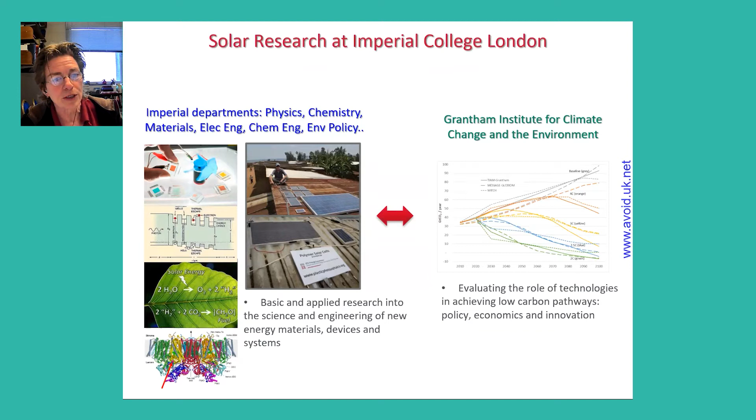And so it was quite interesting to then think, okay, is there some way that we could try to interface our work with these tools that could help to ask questions in a global sense? So coming back to where I came from, for the last probably 20 years, my main research has been focused on soft electronic materials. We used to call them plastic, but basically carbon-based electronic materials and their applications, and particularly to solar energy conversion, also known as organic solar cells, organic photovoltaics.

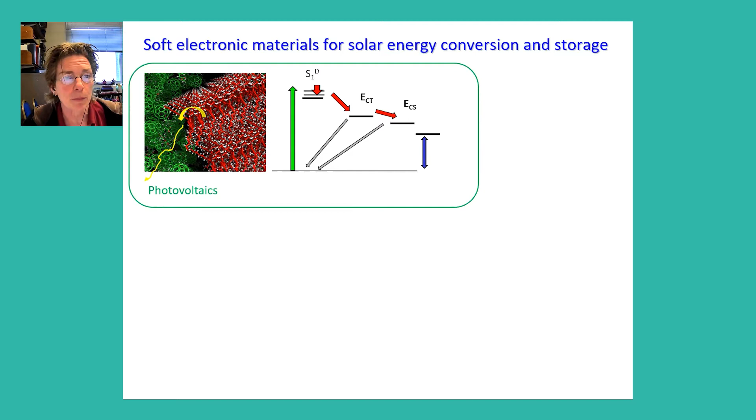And that's a research area that involves understanding materials, looking in detail at the process of a photon absorption, a charge transfer event, and then the generation of electrical current, and how that depends on the chemical structure and design of materials that you make. And more recently, partly motivated by what I've learned from the policy-related research, I've extended that to look at using similar materials in photocatalysis and also for charge storage. So that's an area of applied materials science research.

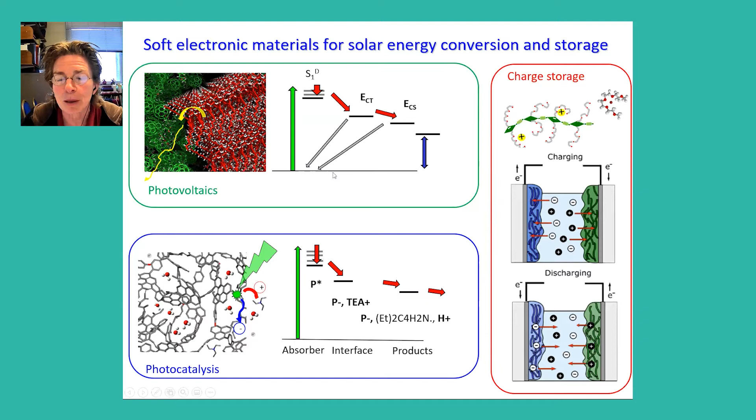But with all of these topics, the goal in the end is to develop materials and devices that will be able to be used to assist with renewable energy generation, and would themselves have an advantage of having a relatively low emissions impact. And one argument for using these easily processable electronic materials is that compared to more traditional materials that have to be processed at high temperature or high pressure, they cost relatively little energy to make, and they are also relatively easy to recycle, and so they could play a part in a circular economy. So there is that argument.

So there's arguments to investigate these materials, but it was still relevant to ask the question, how much could they actually help? And that was the question that I went to when I made friends, so to speak, with the Grantham Institute around 10 years ago. And it then led me onto a journey of doing different types of analysis that I'm going to tell you about today. So the first question is, if it all works out, what difference would it make?

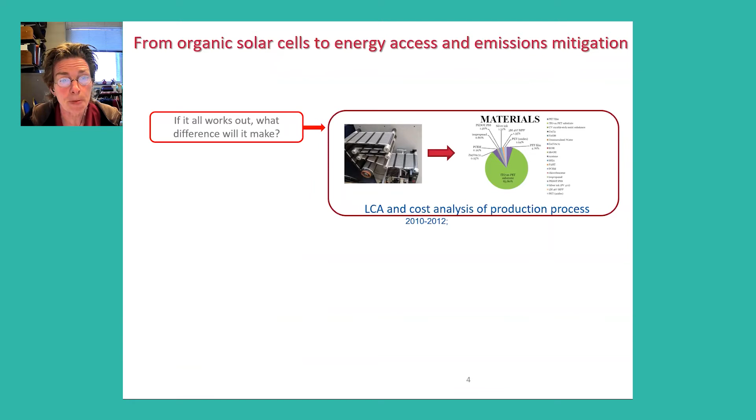And so the very first thing that we did was to implement an analysis in terms of the energy requirements, materials requirements, and the costs of the production process that we envisaged using for our plastic electronic materials when manufacturing them as solar cells. And that would allow us to look at the impact of production and materials on the costs and the emissions together.

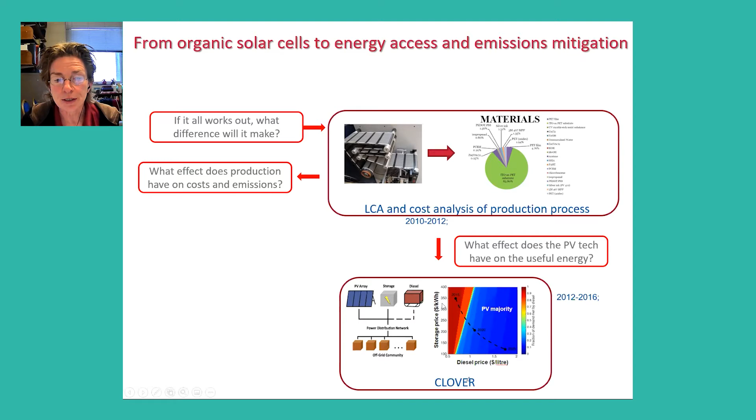And that work then led us to think about the use of our PV technology in a larger context. So in fact, it would be used together with other elements in a system. It might be a grid connected system, or it might be an off-grid system to provide electricity access. And then you need to consider more things. It's a more complicated problem. We need to consider the role of the storage, the competing role of fossil fuels that might be available, and so on.

And then, having developed tools to do that, we then started to look at how those tools could actually be used in practice. And that led to some other projects, which I'll mention briefly today. And then most recently of all, we returned in a way to this materials accounting question to try to apply a measure of energy accounting. I'll explain what that is later on, as a way to try to evaluate different low carbon or mitigation options in general. So this graph basically sums up the things that I'm going to talk about today.

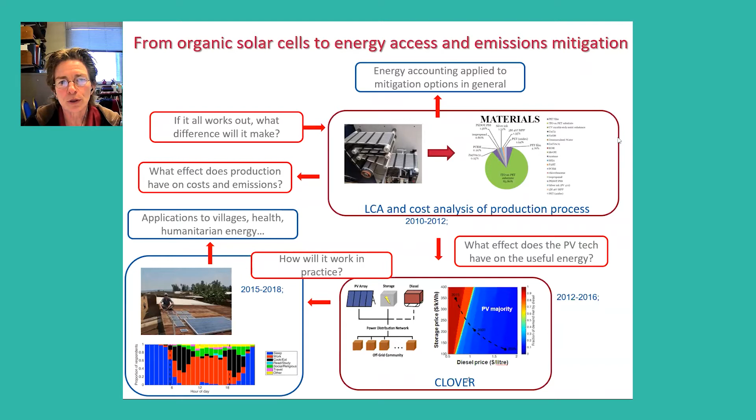And I'm going to start with a few comments on this work that we did early on, looking at the life cycle and cost analysis of materials. This is just another way of looking at the same space, if you like, that we care about when we want to think about the question of what would be the impact in the end of developing a new technology or a new way of making a technology. That involves thinking about the manufacture. What do you need to spend in terms of materials and energy inputs, and also money?

How will it perform when you integrate it into a system with other technologies? And then in the end, how would you deploy it? What are the other issues? What in the end would be the impact on greenhouse gas emissions compared to not having developed the new technologies? That's kind of the big picture.

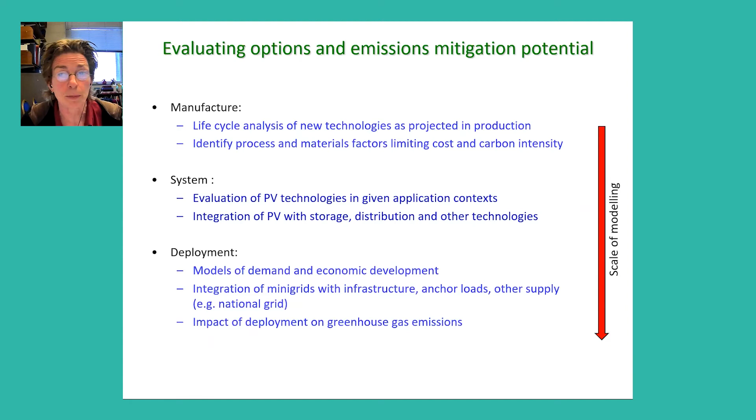So to go back to where we started, as I mentioned, I was looking at solution processable plastic, molecular semiconductor materials that could be used in solar cells. And these materials were very attractive initially from the standpoint that the devices could be made cheaply compared to the processes that were used for silicon or other inorganic solar cells.

And the process would be something that's based pretty much on a kind of high throughput printing or coating process, where you'd start off with an electrode and then you put down layers on top of that, layers to collect the current on either side, and then your active layer in the middle, which is the one that would absorb the light and generate the electric current, electrons and holes from the light absorption.

So in order to make an analysis of the energy input and the cost of this process, we worked together with colleagues in the Danish Technical University who were developing a prototype printing procedure to make such solar cells, and they shared with us information about the quantities and the processes and so on.

And I had a very talented student. Actually, Chris came first of all as a visitor, wanting to get some research experience after he finished his degree, and he ended up staying to do a PhD. And this was the first project he did, the accounting for this exercise.

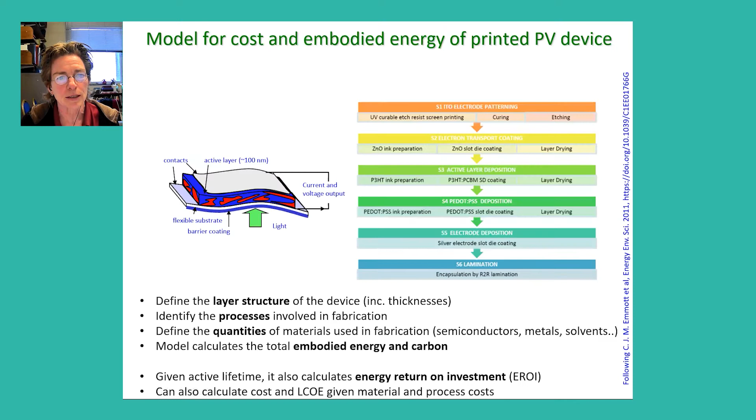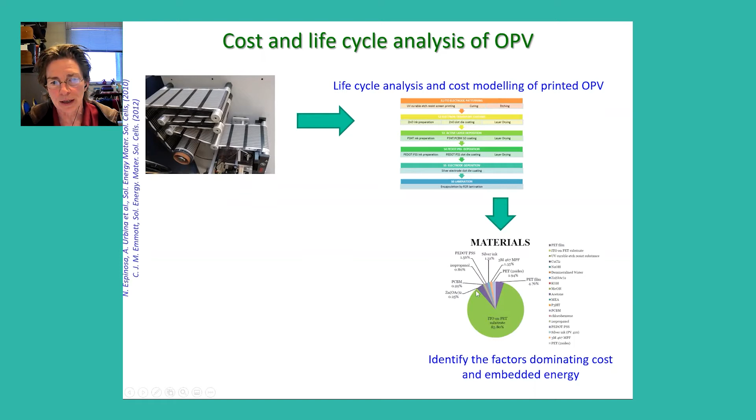And then the point I want to make here, so we took a process. This is actually a photo of the setup in the Danish Technical University. This is just a cartoon of the way we do the elements in our accounting. And then we come out of this with, if you like, a bill of materials that's telling us how much energy is spent on the different components.

And one of the things that this told us straight away, there's one big component. There's like a showstopper, if you like, in terms of the energy required. And that is that this indium tin oxide conductive layer that was put on top of the plastic substrate was going to be the most important component and influence the effectiveness in energetic terms and in cost terms of the device more than any other component. The same thing comes from the energy and the cost analysis.

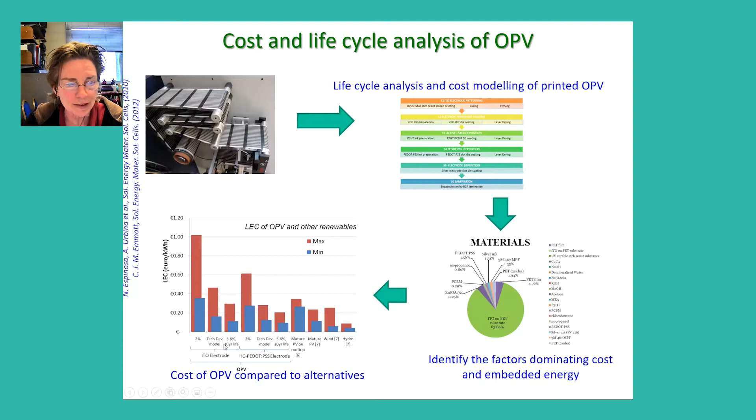And so what that told us at the time was, if you're thinking about what's the most effective thing to research, if you want this type of solar cell to be as effective as possible, it actually makes more sense to go and try to find another material to use as a conductive electrode than indium tin oxide, than it does to improve the active layer efficiency by a factor of 2. It was that big of a difference. On the whole, when you think about the energy and cost balance, it would be much more effective to find a better electrode material.

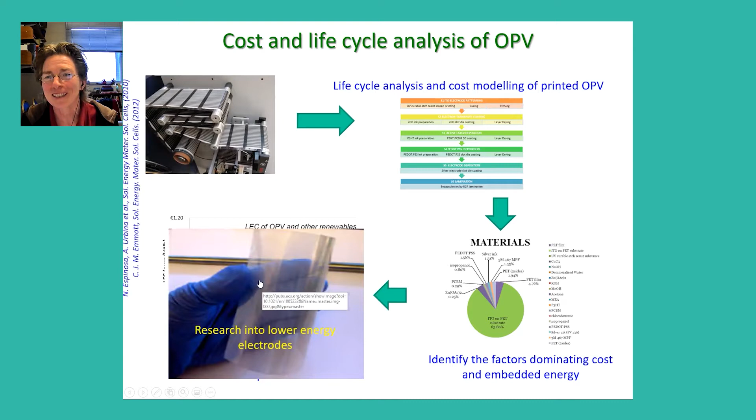So that's just an example of how doing this type of analysis could actually help us to try to direct the research into a better direction, given the end goal. It's just one example. So we did our life cycle analysis of our organic solar cells. We looked at how they are now, and how they'd be in the future if economies of scale begin to kick in.

And then we decided what we really need to do is to look at how different PV technologies would compare in practice, in a practical situation. And we decided to make that comparison by considering an off-grid PV system, a PV minigrid.

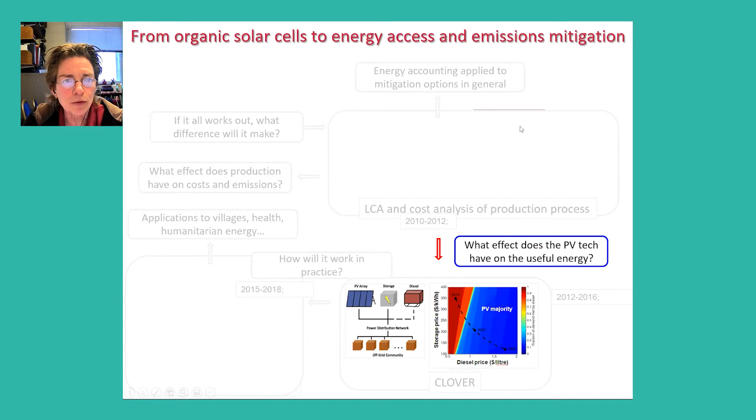And part of the reason for that is because one of the biggest opportunities for solar photovoltaics is in providing electricity access to the developing world, because there's a huge need. There's a very large number of people still without access to electricity, or even if they have access to electricity, quite often it's intermittent.

And these are precisely the countries that are still using a relatively small amount of energy. And so in the course of development, they have the opportunity to go straight to low carbon technologies without passing through the phase of fossil fuel dependency, which Western countries like ours are dependent on.

And of course, governments and agencies and communities working in all these countries are very interested and active in taking up renewable energy. So it made sense for us to think about the role of PV in an off-grid setting, because it's a complete no-brainer in terms of whether you should do it or not, or so it seemed to us.

And it also provided us with a relatively closed system in which we could make quite easy comparisons without needing to think about the entire electricity network and all the other power sources. So that was our kind of motivation.

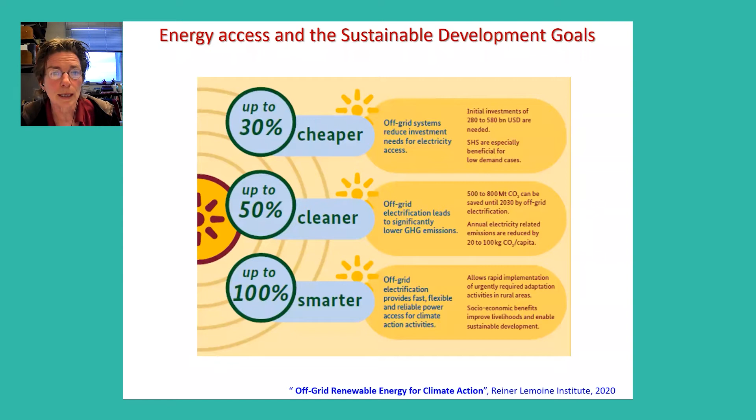And this is when you make a comparison between low carbon development pathways and the default, probably diesel and kerosene based pathway developing into fossil fuel electricity. So there's definitely a significant saving that can be made. And of course, later in the century, that saving is going to be much, much bigger as development proceeds. So it makes sense to look at this question.

So the work that we started with, we made a fairly primitive model. We included in our model a PV generator, batteries. We considered different types of PV, different types of batteries. We then included a diesel generator, as diesel is the standard option for electricity in off-grid locations, and then modeled the supply and demand for communities based on knowledge that we had of electricity demand in different areas of India.

And we considered some different locations which would differ in terms of the climate and therefore the solar resource, and also in terms of the terrain that would influence how easy or difficult it was to get a grid extended to those areas. And we compared our organic solar cells with silicon, with other types of solar cell. And we also considered different battery options. And then we did a calculation of how much energy would be generated, what would be the specific emissions, what would be the cost of the system, the cost of the electricity for all the different configurations.

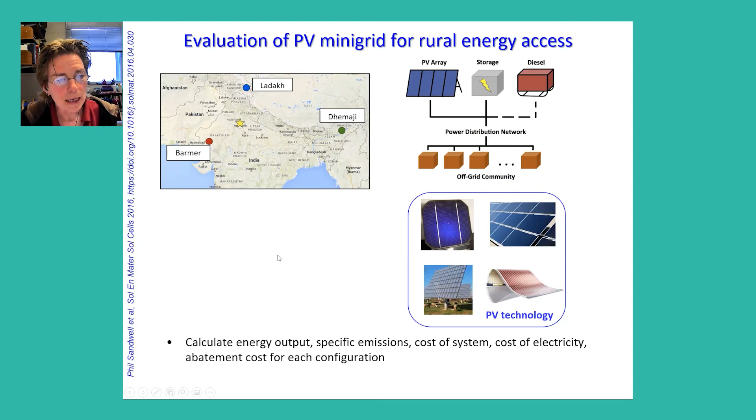And we came out of that learning some things that surprised us. Of course, with hindsight, they shouldn't surprise us, but they did. The first thing was that it's pointless to think about the cost of the electricity you generate, because even in a standalone system, a lot of it is probably not useful or not going to be used. And we should actually think about the cost of the electricity that's actually used.

The second thing, and this probably was the first thing that surprised us a bit at the time, was it actually was almost completely irrelevant what sort of solar technology you used, so long as the lifetime was adequate. We did find that the cost of storage was very important, and that dominated the size of the system, and it dominated the cost of the optimum system.

And we also found that the mini grid could actually be cheaper than the fossil fueled alternative if the subsidies on fossil fuels were not too high. So this actually was a critical thing. If the subsidies on diesel were absent in the case of India, then the solar mini grid would straight away become the cheaper option.

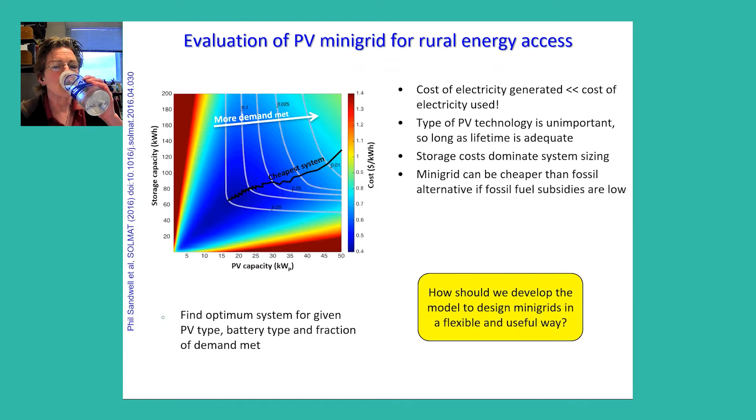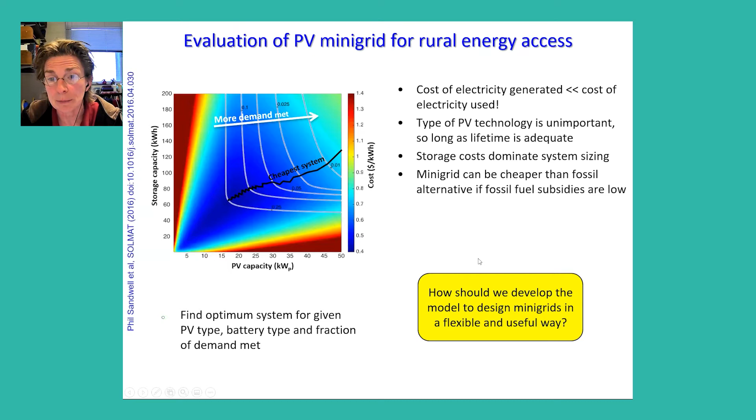Excuse me. So then that led us to think, okay, there's something quite interesting here to investigate, and we decided that we needed to make a more sophisticated model that could be used to design mini grids in a more flexible way and could actually be used in the field. So what we wanted for our model was something that could use real data. Nowadays there are, of course, data sources for things that are relevant, the solar and wind resource in different places. Demand data is a little bit harder to get, but we also work on that.

And of course, there are up-to-date data on the costs of components and so on. So we wanted something that could connect to databases that are already available and out there. We wanted a model that could be continually developed, so that if some new technology or some new idea comes along, we have the capability to include it in our model system.

And we wanted to be able to address a question which is actually very important in the context of rural energy access, which is how to integrate this solar mini grid with other power sources, such as a national grid, because most developing countries have an aspiration to extend a national grid across the country.

That's very good in energy access terms, but it can be slightly worrying from an emissions perspective, because the national grid nowadays will tend to be based on fossil fuels, and the emissions intensity of that power would be higher than the emissions intensity of a solar mini grid, but the cost would probably be cheaper because the grid may be subsidized as a large scale thing. It will tend to be cheaper. So that's an issue, this sort of trade-off between emissions and cost, particularly in the context of grid extension. So that's something we wanted to look at.

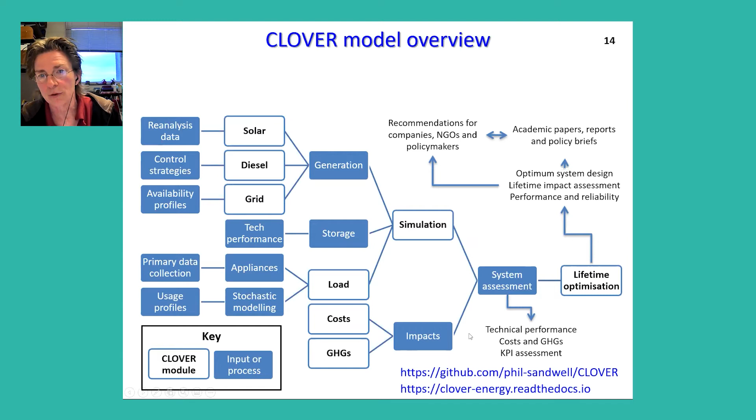So that's kind of summarizing. In many developing countries, so India is an example, but we've also got projects going on in sub-Saharan Africa, in Rwanda, in Uganda as well, we have a situation where the grid provision is kind of intermittent, if it's there at all. There's definitely an opportunity to provide energy access and reduce greenhouse gas emissions by using mini grids. And we've developed a model that we would like to use to investigate the possibilities.

So just some examples of the sort of thing that we've been doing. These are results for a case which is based on a rural community in Uttar Pradesh. It's actually a community that we have been working with, and we collected usage data from this particular community. We have some information about how big it is. It's got some industry there, which has this daytime demand.

And these graphs are showing us the hours of the day. So here is how much solar there is. Sun shines during the daytime. The demand peaks in the evening, just like it does here. But the demand for businesses tends to peak in the middle of the day. Of course, there's a nice match between the business demand and the solar generation.

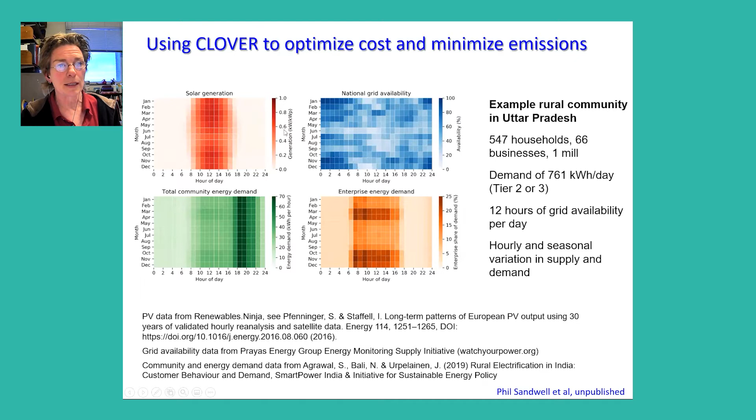So what would typically happen is you have a generator running on diesel, and you would run the generator to provide electricity during the times when the grid is not available. So that's the counterfactual. That's the situation that would happen if there was no solar mini grid. And then we introduce the possibility of having a solar mini grid that's got PV and batteries. And we give it to the model and we say, okay, go off and find the cheapest solution.

And the condition we would give it is, say, find the cheapest solution whenever you want to provide electricity for, let's say, 22 or 20 or 12 hours per day. And you have at the same time as much PV and storage as you want, plus a grid that provides, and then this is the other coordinate, 12 or 14 or whatever hours per day. So you tell it what the grid provides, and you tell it then go off and find the cheapest way of actually meeting a demand of 20 or 22 hours of electricity per day or whatever. And then it fills in.

And the numbers are telling us, and the color is telling us the cost of the cheapest system. And so if you have an intermittent grid, and you want to have a high service, you have to pay. And the cheapest way of meeting that high service is with a system. So this is when we look at the next graph. This is telling us how much PV is in the system. So the cheapest system would be one that has a lot of PV.

So in other words, it's cheaper to meet that gap in demand using a PV mini grid with current prices than it is with the diesel generator, which would be the alternative. And moreover, not surprisingly, that solution is also the greenest one. So it reduces the overall emissions intensity, as averaged over everything from the grid and not the grid, by a very great factor. So that's a kind of straightforward conclusion. It wasn't completely obvious it was going to be like that, but it is.

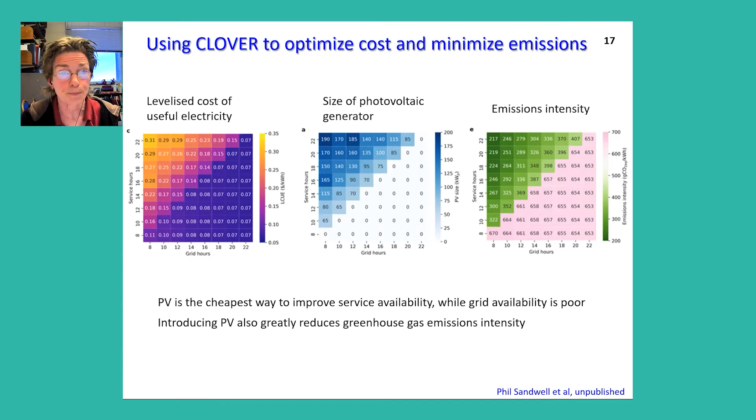But basically, if you have a grid which is only partly available, and you want to improve the access to electricity, considering PV and diesel as options, PV with batteries is the cheapest way to do it. And it also reduces the greenhouse gas emissions intensity. So if we want to increase electricity access, it's a win-win situation where the solar mini grid is both the cheapest and the greenest.

And then we come to the thorny question. I'm sorry, this graph is not maybe very easy to read, but I'll explain what the main point is. The thorny question of what happens if the grid service improves. Does it then mean that your mini grid is no longer useful? And so we did some analysis of that, looking at improving the availability of the grid, and then finding the optimum system, the lowest cost system. And the thing that we made was a comparison between having the mini grid and the grid, and just having a grid.

As you improve the availability of the grid, the advantage in terms of your electricity access decreases because the grid is becoming more available. And the emissions intensity, that's the green curve, increases. But still, you're saving on emissions relative to the situation where you relied only on the grid, and you're also improving in terms of access to the service.

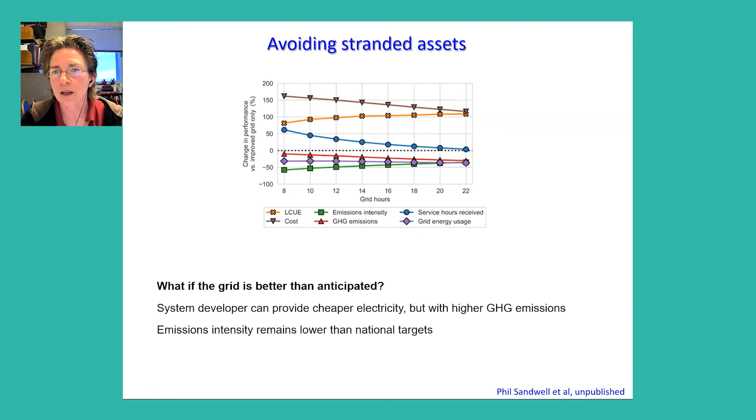So if the community still wishes to have improved access to electricity, it's still going to be a worthwhile thing to do. So the mini grid does not become redundant. It just becomes less of a win-win option as the grid becomes better. And then we hope, of course, that eventually the grid itself will become lower in its emissions intensity as coal and gas are replaced with renewable sources. So that's where we are with that.

Now, I'd like to go on to comment, so you can say, okay, that's all theory, so what? We have actually been using our model in a real life situation, and the background to it is that Phil, when he finished his PhD, went off to spend a period of time working with an NGO called Practical Action, and the project that he was working on was to do with energy for displaced people.

And the situation is that with displaced peoples, very little attention until recently has been paid to things like energy access, because refugee camps are supposed to be temporary. And if they're temporary, then you shouldn't need to think about the sources of energy. However, of course, they're often not temporary. And globally, there is a humanitarian crisis with a very large number of people who are displaced.

So in 2019, there were about 70 million people displaced. And most of those people don't have access to electricity and are reliant on traditional fossil fuel heavy sources. So recently, through a number of UN international agencies and non-governmental agencies, there was a growth of interest in this question of providing electricity in humanitarian settings.

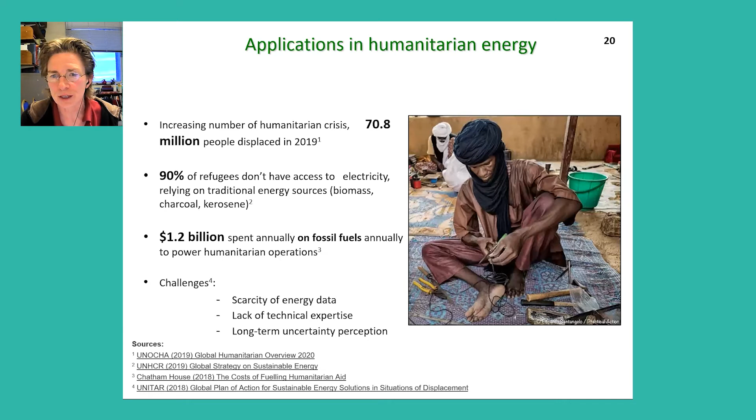So that then led us to a collaboration with a company that does PV installations in Rwanda. They're called Mesh Power, and also with a refugee agency that works locally called Alight, and also with the UNHCR. And we then started work on a project where we were designing the PV system to go into a refugee camp called Mahama in Rwanda, where there's about, I think, 60,000 people living. And until the start of our project, there was only a diesel generator to provide the offices.

And there was already a kind of a plan to replace the diesel generator for the agency offices with a PV system. And then we got involved and extended the project to provide also a PV generator, not only for the offices, but also for the health center and for the marketplace. And so that's a project. We got a little bit of funding for that from the fund called the Global Challenges Research Fund. Some of you may know about it.

And the project kicked off at the end of 2019, and unfortunately it was interrupted in early 2020 by the pandemic, but soon we hope we will be able to go back and complete the project. So we used our model to design the system, and I don't give the details here, but the projections are saying that the introduction of the PV system is going to introduce substantial savings in terms of cost, because you don't need to buy diesel anymore, and obviously in terms of greenhouse gas emissions, because you don't need to burn diesel anymore. So that's quite an interesting application, and it's the first of its kind. And depending upon how it works out, it may well be followed by others.

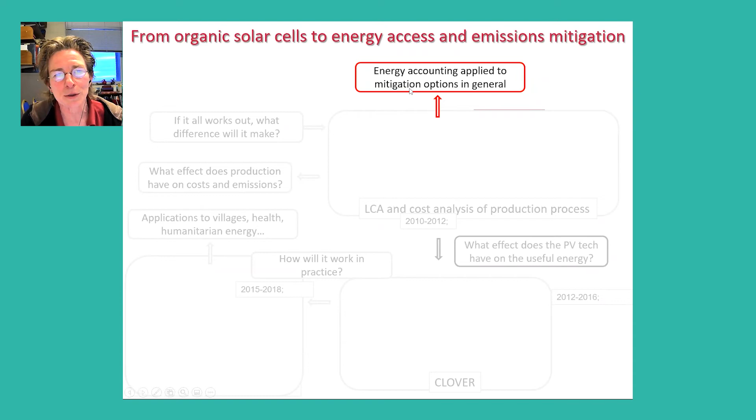A lot of what I've been talking about has been about energy systems for development, for rural energy access. And you might say, okay, that's not the biggest problem that we face in terms of reducing carbon emissions. Although in the future it could be if we went the wrong way, of course. But I just want to comment on another thing we've been doing, and it's to do with energy accounting applied to mitigation options in general. And the context is this. You may recognize these.

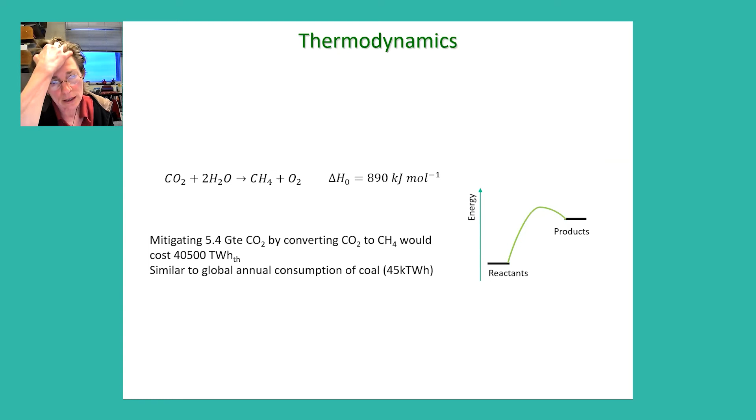But they might not be. And the thing that we did was to pay attention to, we were particularly interested in this proposal that's been put forward, that carbon could be removed and then used in something else. And the problem with removing carbon dioxide and then using it in something else is that if you do anything to reduce carbon dioxide, you have to pay a lot of energy. And if you have to pay a lot of energy to do something which is removing carbon dioxide, then in the end, you might not have solved the problem.

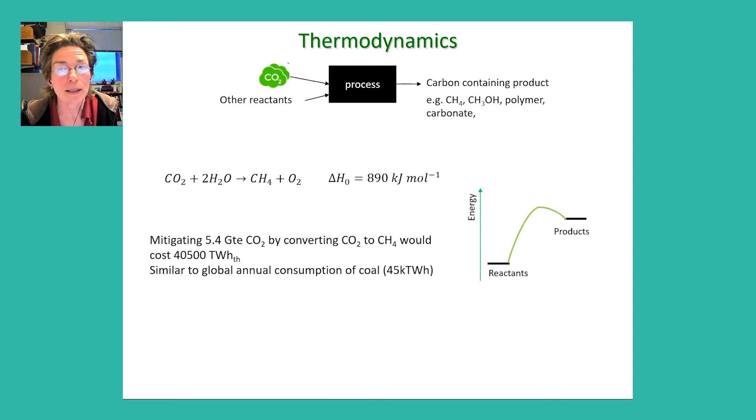So we started to look at different options for carbon dioxide removal using a metric, which is how much energy do you have to pay to remove 1 gram, for example, of carbon dioxide. This is work that I did with Oytun Babacan. It was published last year. And so the point of this is that it's kind of like working out an emissions intensity, but not only considering electricity generation, but also considering things like removal of carbon dioxide using BECCS, or even this idea of converting carbon dioxide into something else. And then we were looking at, in each case, if in the end you have removed X grams of CO2 permanently from the atmosphere, or hopefully permanently, how much energy do you have to pay to do that?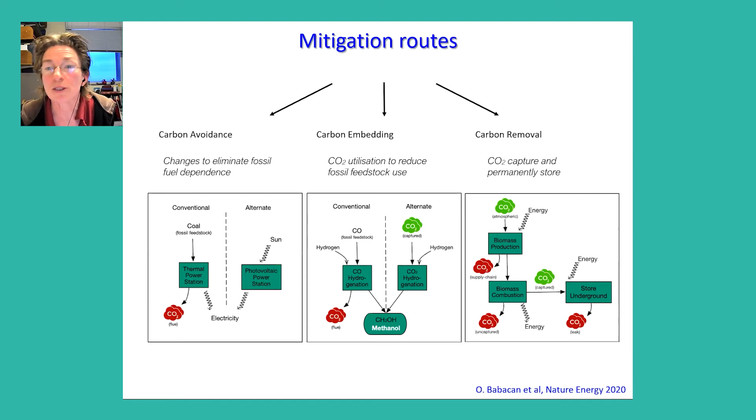And I'm just going to zoom to the end, which is this graph. So we then defined our metric, which we call the carbon abatement energy. So that is how much energy, in its thermal equivalent, you need to pay per kilogram of CO2 that you removed, and then compare different things. So we compared, for example, this low carbon electricity. The example here would be if you were to replace a coal-powered power station with a wind or solar generator. And then the cost in energy terms is quite low, because although there's some energy embedded in building the new power station, you save a huge amount of CO2 by not burning coal. So that's kind of obvious.

There's some things that are complete no-brainers, like replacing incandescent lamps, old-fashioned light bulbs, with LEDs. Then you not only save energy, but you save carbon as well. And then the interesting things are when we start looking at some of these other options. The options that were suggested as ways of removing carbon from the atmosphere, like DACCS, direct air capture and carbon storage, and BECCS when used as electricity or as fuel, they are not nothing, and significantly higher in terms of their energy implications than it would be to substitute low carbon sources of electricity for high carbon sources. And indeed, they're more energy intensive than it would be to try to avoid emissions by generating and then using hydrogen. And then the idea of converting carbon into products where the CO2 is reduced are basically just ridiculous in energy terms.

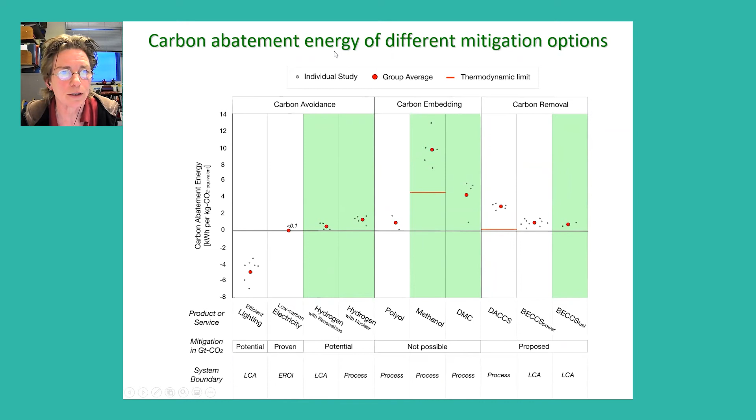So to conclude, I expect solar photovoltaics is going to play a role in decarbonizing the future power sector in both developed and developing countries. And I've talked about a tool that we use to try to design the best solutions. And we were happy to find that the solutions based on solar mini grids in many situations will be not only greener than the alternatives, but also cheaper. And we also have been able to use our tool in helping to design the system in humanitarian energy provision. And my final point is that more generally, I believe energy accounting can be critical in helping us to decide the optimum transition pathway. So that's it.